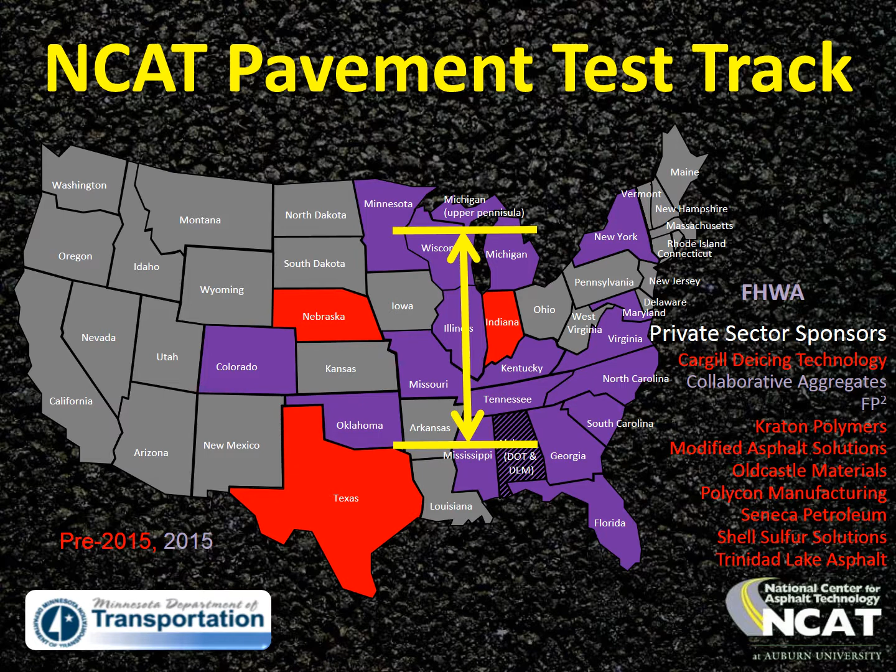FP2 has continued the sponsorship relationship it has as a full partner with all the state DOTs, and that has been extremely helpful to us in terms of making the right kind of selection of treatments, putting them in the right location, and achieving the right level of construction quality to get results that are as meaningful as possible from the research.

To address my subject today, I've grouped my content into 5 categories: smaller, finer aggregate blends, reduced gyration level mix design - some of these things Matt touched on - and what I like to call healthy binder content, which we're now trying to achieve through balanced mix design. That's just the way we did mix designs before the price of liquid asphalt skyrocketed and the pendulum swung towards drier mixes. Now we're trying to get more of the right binder content instead of just a dry, cheap binder content.

Reclaimed and recycled materials, and then finally, to summarize all that, what we perceive to be the need for not just a cracking test, but possibly a suite of cracking tests that predict the distresses and types of cracking that Matt talked about, but do it for the climate extremes.

Our perception is that we have a need for very simple tests that industry can run, both when doing mix designs and when producing mix for the state DOTs - tests that DOTs can use to approve mix design, not just tests useful for research purposes - and tests that cover the climate extremes. There are things that probably work at the track that don't work up in Minnesota, and vice versa.

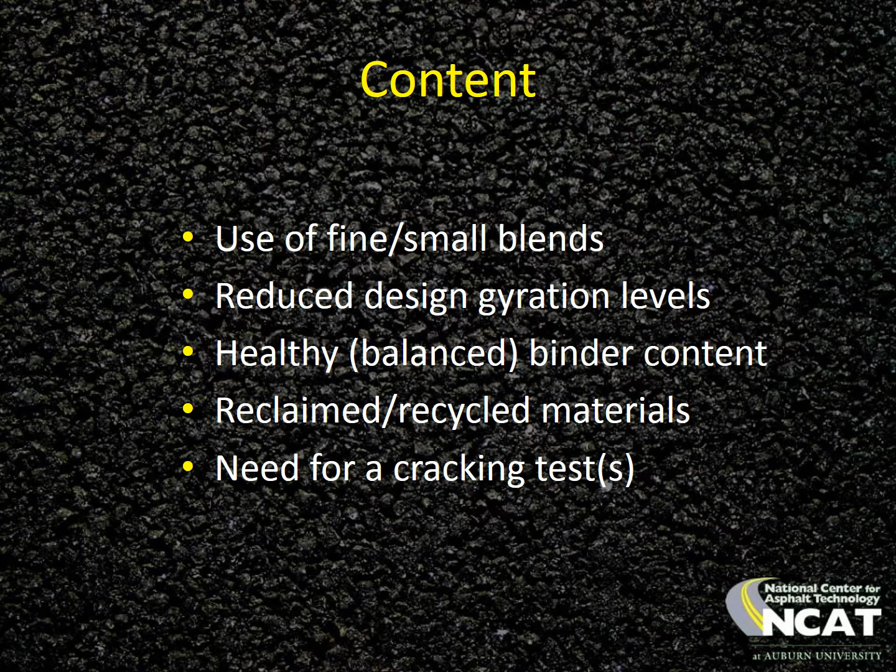So what we really want to do is just let the data speak for itself and identify which tests work and which tests don't work.

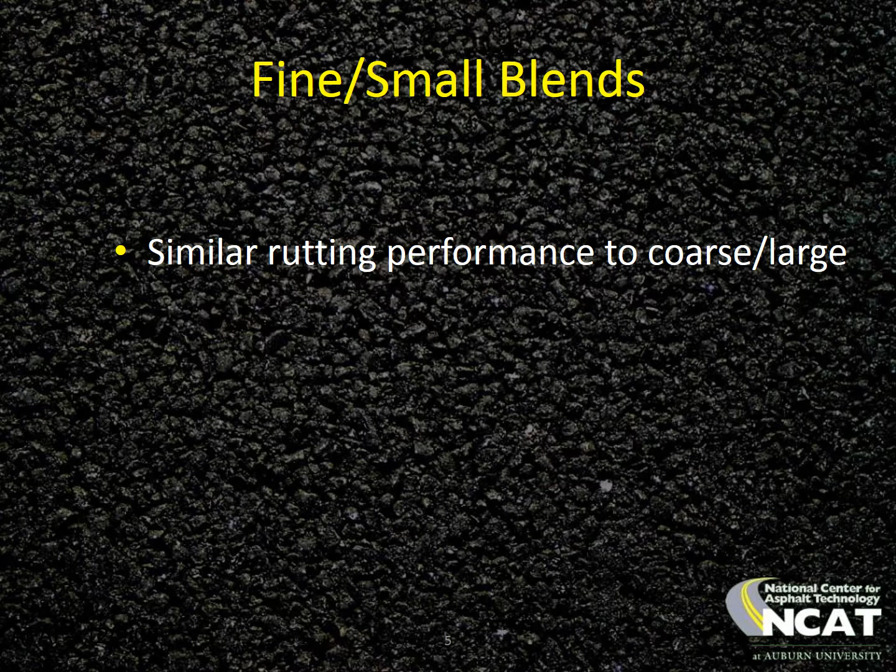On the subject of fine, small blends, through 5 complete cycles of testing on the track, now 51.5 million ESALs, we consistently see similar rutting performance between coarse, large mixes and small, fine mixes. I think because of the success of SMAs imported from Europe, and when we implemented SuperPave, we thought we had to have rock-heavy mixes to get this larger stone-on-stone contact. But we find that as long as we've got a good, stable aggregate structure, it doesn't matter what the size or blend is, whether fine or coarse.

The whole trick is there's a longer path for crack propagation, and also a higher effective binder content. It's ironic that the 2 best performing mixes at the track are SMAs loaded up with rock, and the finest blends loaded up with screening size materials - you go from one extreme to the other.

What they both have in common is high asphalt contents. We get high asphalt contents in those rock-heavy SMA mixes by loading them up with fibers to thicken the film coatings without a drain-down problem. And because of coating all those screening size materials, that's what gives us high effective binder content in the finer mixes, as I mentioned earlier this week in another presentation.

The 2 best mixes, arguably, that we've had on the track: the first is an SMA placed in 2000 that's still in place, now down for 51.5 million ESALs in 16 years, with no cracking, no rutting, no raveling. The other is a 4.75 thin overlay mix, only 3/4 of an inch thick, placed in 2003 - now down 13 years, 41.5 million ESALs, no cracking, no rutting, no raveling.

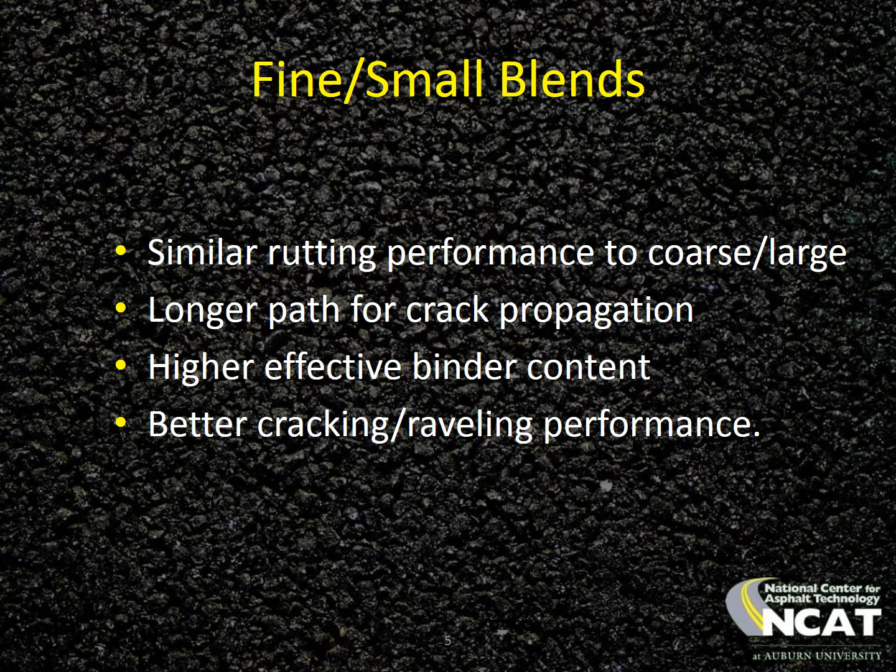To me, that represents those extreme conditions that we've got to capture and implement as an outcome. So we do see consistently better cracking and raveling performance.

The two things that sold me on this - I got really upset the first time we blew a tire on the track, probably back in 2001, and we had this nasty, ugly rim scar like we have on real roads, and it gouged the pavement. Those of you involved with agencies know that in a lot of cases that leads to a crack, and we have to go back and seal it, which becomes a big maintenance burden.

I was taught when I grew up within the DOT that fine mixes have their place on low volume roadways, but that's where we need to keep them. We need those rock-heavy mixes. I was with ALDOT when we did SuperPave implementation and started the PG binder grade system within our specification framework.

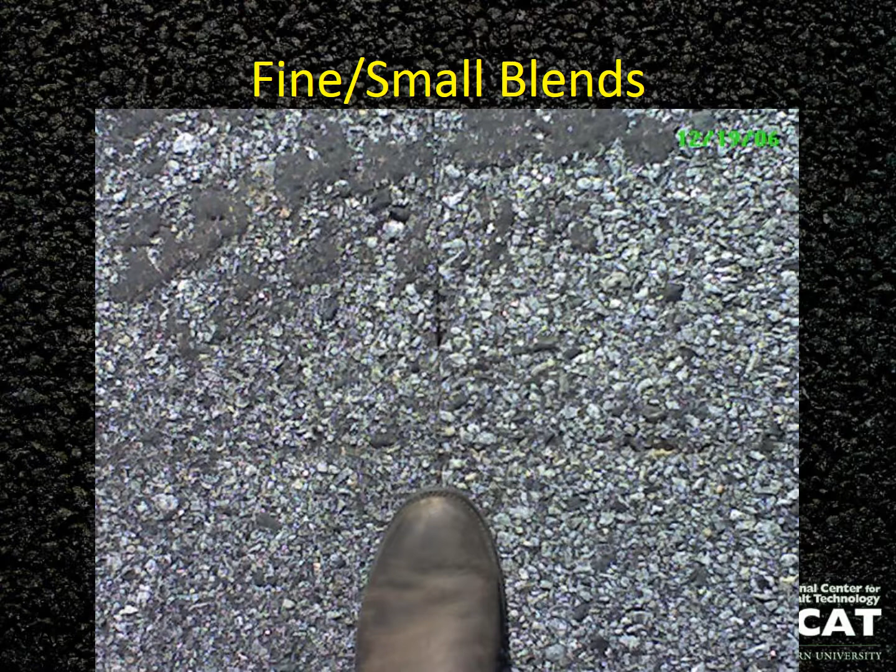You can imagine it's got all kinds of rim scars in it, because through the years we've blown a lot of tires and done a lot of scarring type damage. There's no cracking that has formed in that section. So that's the first big issue that sold me on this.

The second big thing was an event that occurred—some of y'all have seen this video—but we had a driver get too high in the west curve, and he dropped axles off onto a soft shoulder. We lost a trailer, and we laid down the number 2 trailer, and it just kind of dragged for maybe 400 or 500 feet. You might have seen the sparks flying up off the mat when that second trailer laid down and dragged through.

It happened to just fall over on that 4.75 mix—that's where this camera is pointing in the west curve. All it did was sort of scuff that mix up. But as soon as it hit the coarser mix out past it, it just started ripping out chunks of pavement. That is as good a billboard as we have for durability as anything we've seen on the track.

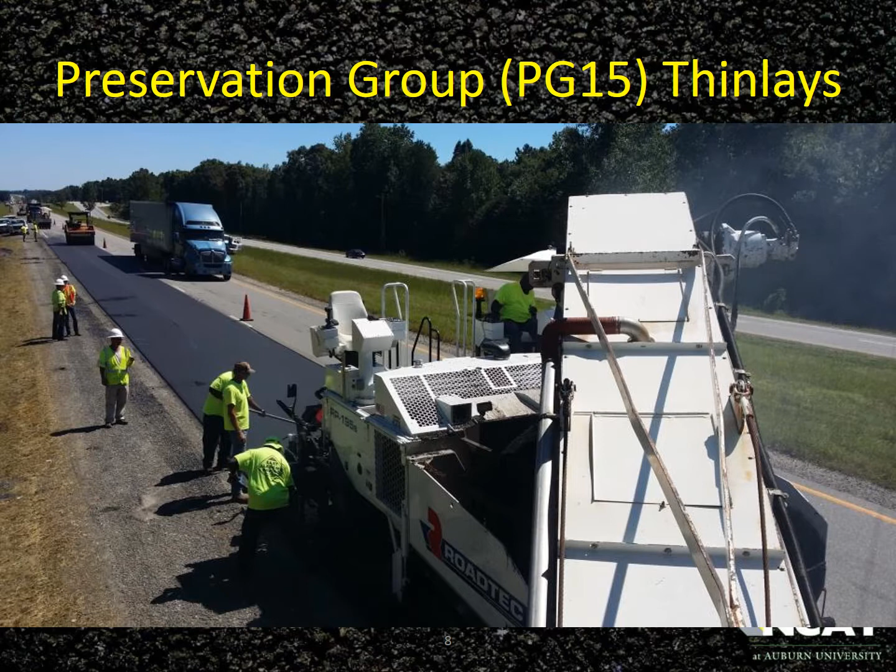So those really changed my mind about the potential of these finer, smaller mixes. When we did the thin overlays as part of the preservation study on Lee Road 159, and then grew that out to US 280, the hot mix part of that is these 4.75 mixes. The mixes we used on 159 and 280 are variants of that 2003 mix—the virgin part is 70% limestone screenings and 30% hard sand.

That's a limestone we wouldn't allow more than 30% of in a surface mix in Alabama, where we're sustaining friction at 70% because of the hard sand. So at that size aggregate blend, the hard sand is supporting the friction numbers, and we've measured years and years and millions of ESALs of safe friction.

So we added recycled materials—reclaimed and recycled materials—on 159: fine fractionated RAP and shingles. Then when we went out to 280 with this mix, we added both RAP and RAS, fine fractionated RAP and shingles.

But we did it in an iterative way, running mix at the plant, doing some simple cracking tests back in the laboratory, trying to get to a level where we felt we were going to get really good performance out on US 280.

Interestingly, I set out wanting to do a really high RAP binder ratio mix out on 280 in these thin overlays. I started at 50% binder replacement from fine fractionated RAP and shingles, then bumped from 50 to 40 to 30 to 20, and I had virgin mix to compare all that to.

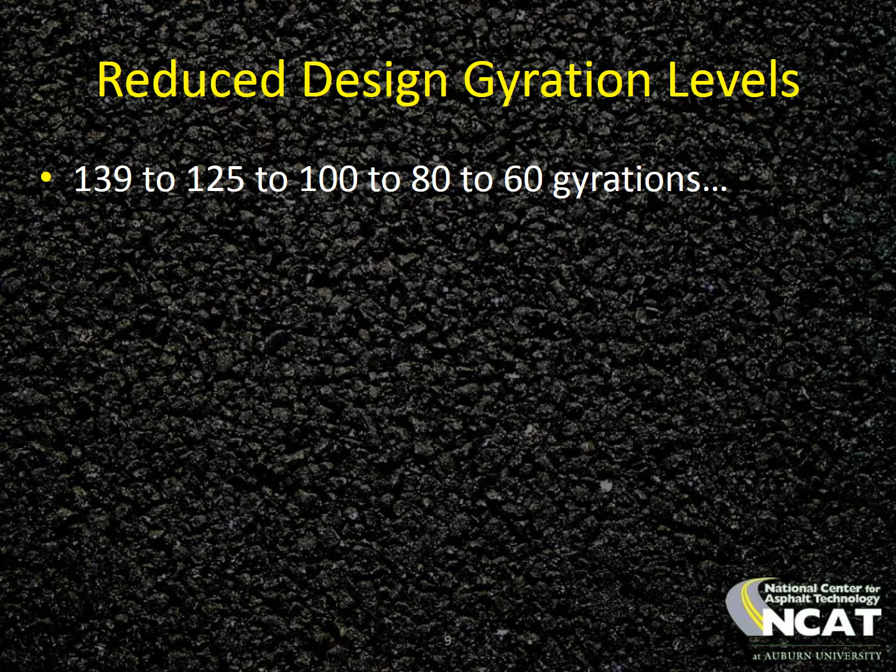So then also on reduced gyration levels, when we first built the track, the highest gyration level in the SuperPave package was 139 gyrations. When we built the first track, it was at 125, then we dropped it to 100, then we dropped it to 80, then we dropped it to 60, and now some states have adopted 50 gyrations. So we're working to try to get the right level of laboratory compaction in order to optimize asphalt content, and the track has been really useful to the sponsor states in order to help do that.

I'm still shocked when I go do presentations in states that I don't have a research relationship with, and they're still using these massive levels of design gyrations, which give us dry mixes, and then we all get upset when we have poor durability and cracking performance in the field. Well, it's part of the reason why: design gyration levels are too high.

So what we promote, and what most states have kind of settled on, is a locking point type of design. At what point are you just crushing aggregate? I think a common place where people are finding with their materials that they're just crushing rock and doing nothing else is somewhere between 50 and 70 gyrations. And it depends on the durability of the aggregate that you have. Any more compaction and you're not really doing anything constructive, you're doing more harm than good.

And the irony is that we use higher gyration levels for higher traffic levels. So where we need more durability, we run the risk of having drier mixes. It's really important to figure out exactly where you need to be with lab compaction to hit that locking point so you can have the healthiest possible mix out there on the roadway. More gyrations produce leaner mixes where we really need richer mixes.

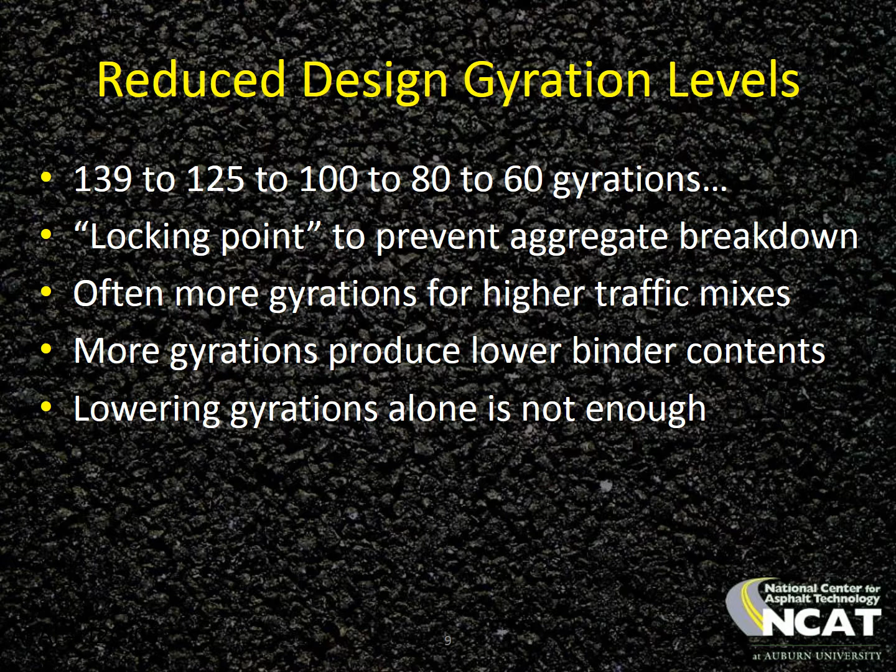But lowering gyration levels alone is not enough, because if all you do is lower design gyration levels, and you've got a good sand source, you can put more sand in the mix and get the same level of air voids, and you really hadn't necessarily done anything. So that's not the only thing you have to do. That's an important thing to do, but we have to remember the importance of VMA.

A lot of DOT people are accustomed to thinking about VMA and evaluating mixes based on VMA, but they don't really get why it's important. It's really simple why it's important: VMA is equal to the air void volume and the effective binder volume. So if you're settling on 4% air voids or 3.5% air voids, whatever your air void design is, then setting a VMA level is supposed to ensure the right level of effective binder content in the mix. That's the only mechanism we have to ensure effective binder volume.

The problem with that is VMA, unlike air voids, is not measured, it's calculated. And the key variable in that calculation is the bulk specific gravity of the aggregates. Matt alluded to this in his presentation: the more you add reclaimed and recycled materials to the mix, the less you have any idea what the bulk gravity of the aggregates really is.

And what I have seen happen in the field, and this is something that's very near and dear to me because I get mix designs from state DOTs to build and put on the track, the mix design has the stockpiles that I have to haul down for their test sections, and it shows what their database says is the bulk gravity of those aggregates. When we run those aggregates in our lab, we very typically get way different numbers, and those way different numbers lead to way different VMA calculations.

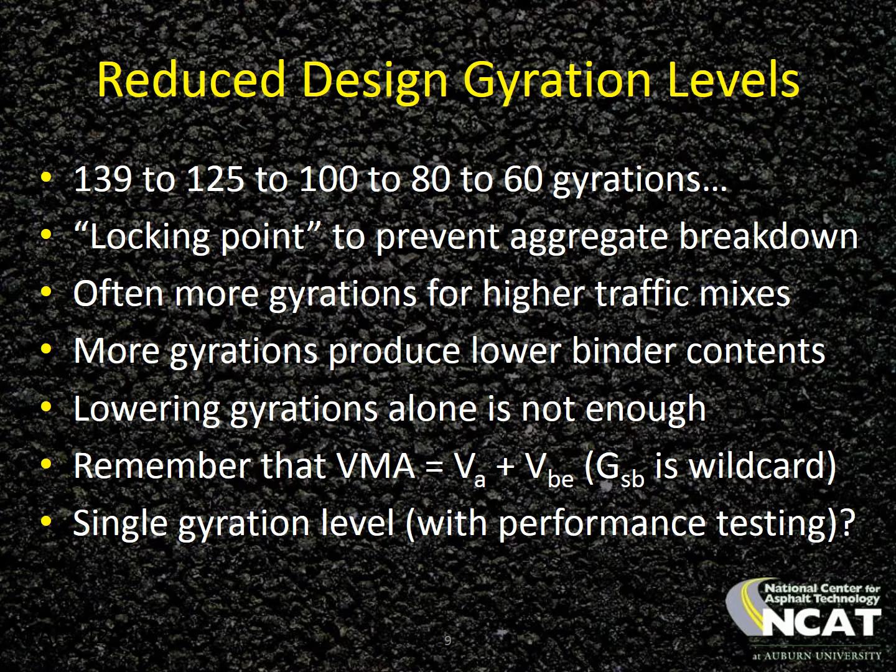Matt did a really good job talking about this, but how much blending occurs between old binder and new binder? Well, that depends on whether you're running hot mix or warm mix, how much silo storage time you have. If you do extractions and recoveries and binder grading, it's going to assume 100%, like you said. Well, with RAP, the data suggests that the vast majority of RAP binder, and in some cases all of it, is available for blending and diffuses with the virgin binder. But with shingles, probably something like three-quarters of it is available for blending, so a quarter of it is good for nothing other than giving you a false sense of what that asphalt content of the mix is. So you have to have a performance test.

Well, the concern they have, of course, is rutting. What we need to do is—their perception is that we have a longitudinal joint performance problem. Or really what they have, I think, is more of a mix durability problem that's creating the problem with the longitudinal joint. So we want to help them solve that, but yet prove that we haven't compromised rutting performance in the wheel path.

So we paved the inside lane and the outside lane of the track. That's not something that we usually do. And we lined up the longitudinal joint between the lanes right on center line, which is not something that we usually do when we're looking at mix performance in that outside lane where the trucks run.

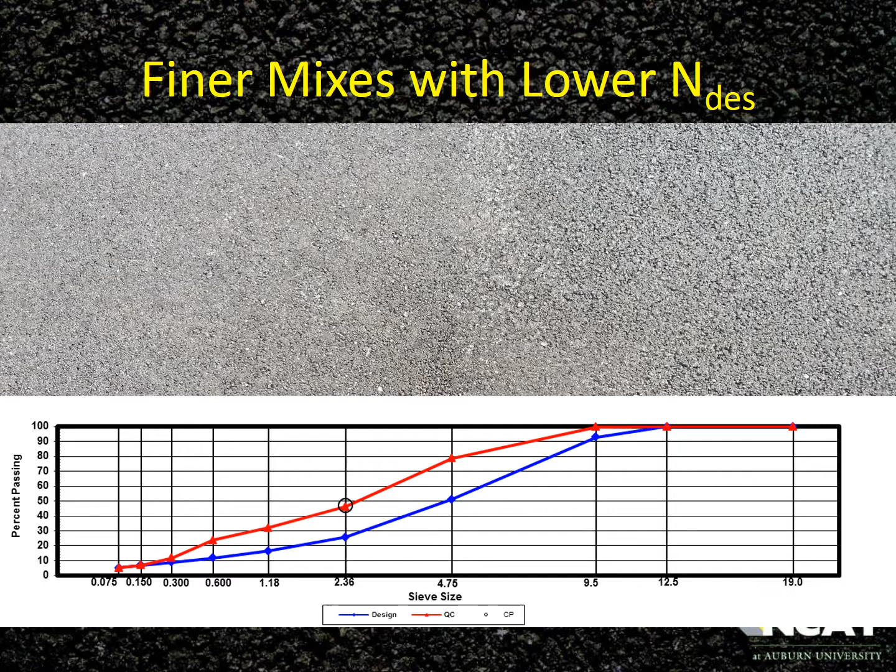You know, usually we think if we're at 92, 93%, well, that's a home run. We've done a great job with those mixes. Well, they're permeable. 19 millimeter mixes are permeable at 92, 93%. 4.75 mixes and 9.5 mixes and 12.5 mixes are not. So, the whole idea of density, we have to view that within the lens of how big is the mix, and that's another advantage of those finer mixes is they're impermeable at lower levels of compaction.

So that kind of brings me to healthy binder content. Well, just talking about reclaimed and recycled content in the mix by total mix weight is not enough. Very typically, state DOTs will have specifications. They'll say 20% RAP, RAS in the surface, 30 or 35, or in some cases 40%, RAP, RAS in binder layers and base layers. Well, what matters is the binder replacement that comes from RAP and binder replacement that comes from the shingle.

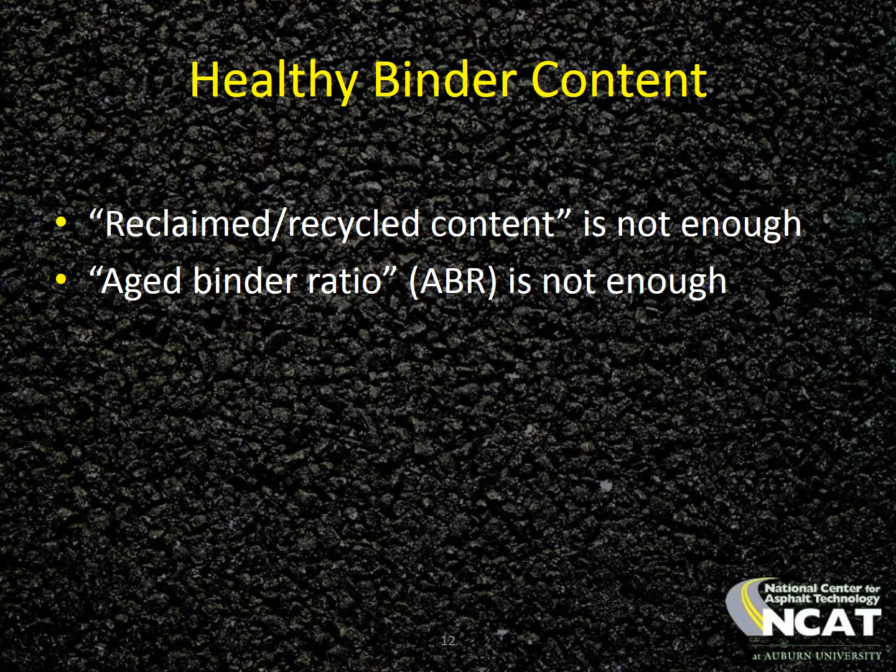So aged binder ratio by itself is not enough. We need to talk about RAP binder ratio and RAS binder ratio, and then even with shingles, it's better to talk about post-consumer RAS binder ratio and manufacturing waste binder ratio because of the age hardening that occurs on roofs before shingles are removed and ground up, processed for use in asphalt pavements.

And this is something I'm having to train myself to do, because that thin overlay out on 280 that we built last summer, 11% fine fractionated RAP, 3% shingles. Well, if you look at binder replacement, that was about 10% from RAP and about 10% from RAS. That's what really matters. It's not the RAS percentage in the mix by mix weight, it's the binder contribution of the binder replacement that you get.

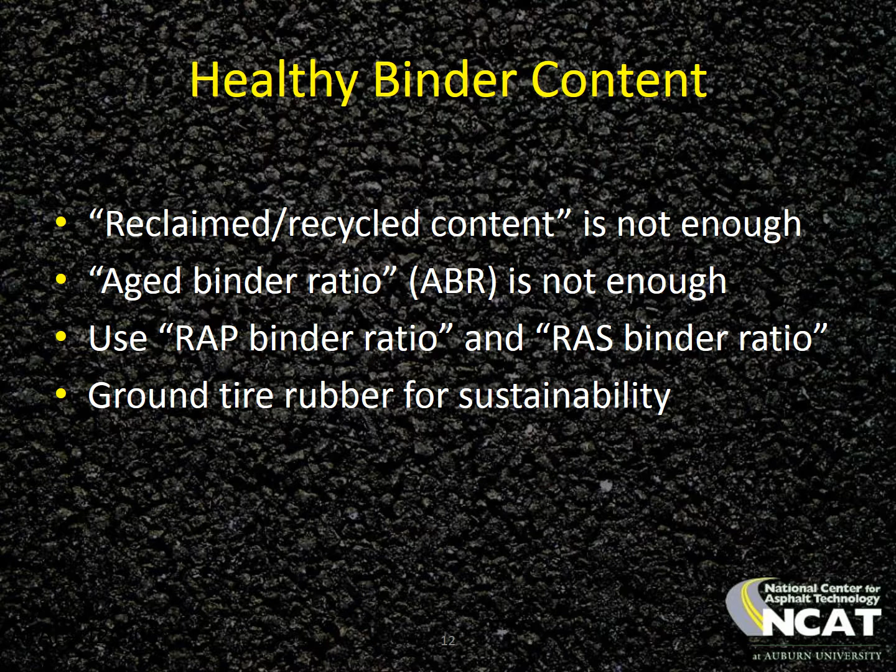We promote ground tire rubber use for sustainability. We've had really good success with ground tire rubber modification of binders, and in fact, Alabama Department of Environmental Management, thanks to Lindy, was a partner in the last track and is a partner in this track, and we're doing work specifically for them to investigate the best use of recycled ground tire rubber in pavements for mix production and

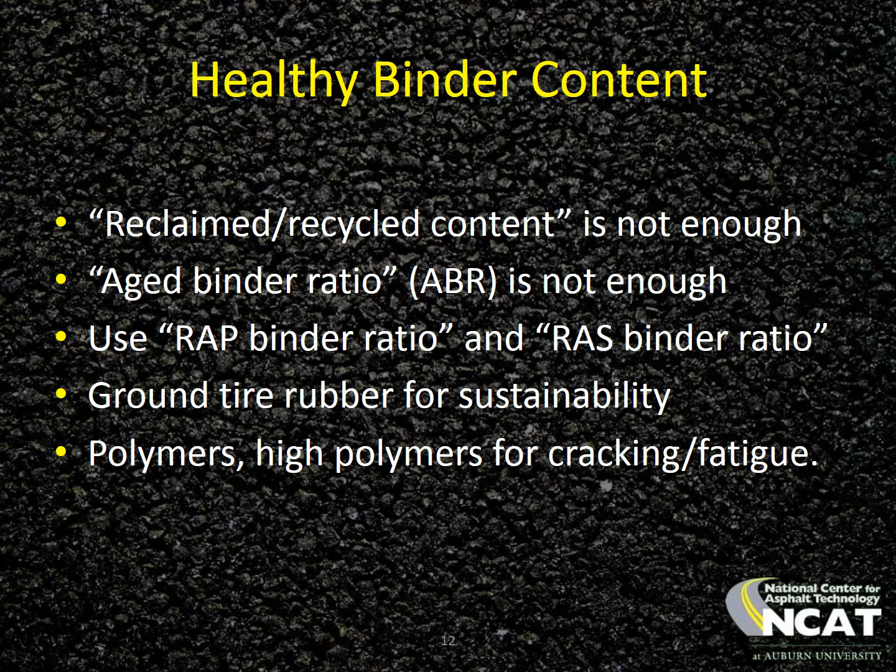also for pavement preservation. Polymers and high polymers for cracking resistance and for fatigue cracking performance of mixes has been a big part of what we've done at the track, going all the way back to the 2009 research cycle. And we've used highly polymer modified binders in a big way that I'll mention in a little bit in the 2015 track.

One of the more exciting things to me regarding recycled ground tire rubber, we've got asphalt rubber mixes, we've got SMAs and OGFCs that we've done that are just ARB binders, 12% binder replacement. But we did work this last summer with 20% binder replacement using coarse ground rubber, minus 16 rubber, and we used it for plant mix production for asphalt rubber gap graded mix, but we also used it for asphalt rubber chip seals.

Rod Birdsell is here, and Rod provided me with some tech support last summer, because they do some of this up in the Northeast. What you see on the left is a coated 7 chip asphalt rubber chip seal, and on the right in the background, that's a coarse fractionated RAP asphalt rubber chip seal that we placed last summer.

That's immediately after placement. Now this is what these look like now, after 1.5 million ESALs, and they look really good. Rod could probably talk about this, but constituents are going to feel better about this than about the typical granite or limestone chip seal that doesn't really look like a paved surface. With embedment of these coated 7 and coarse fractionated RAP particles, this looks like an asphalt pavement, and I could see people being really pleased with it.

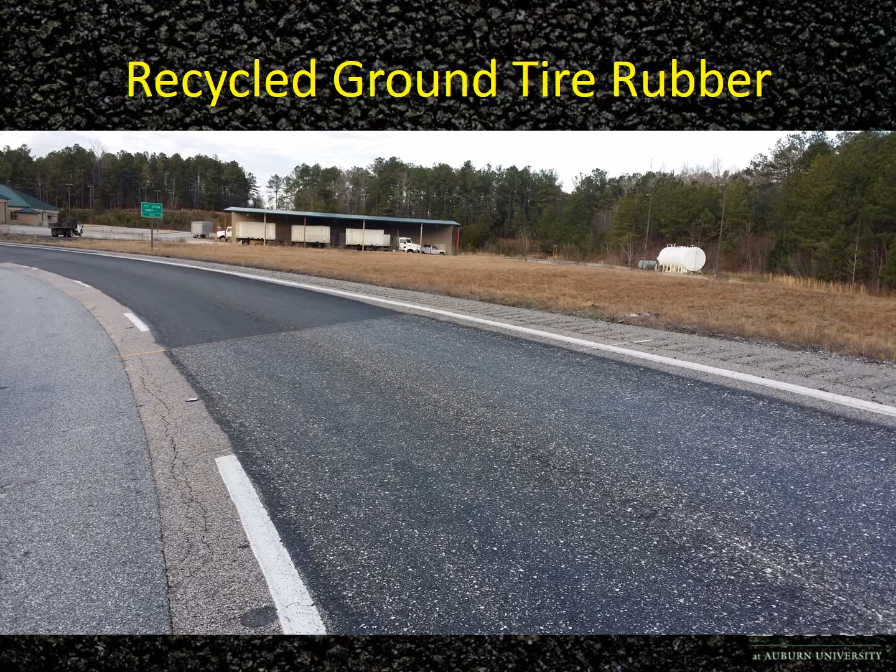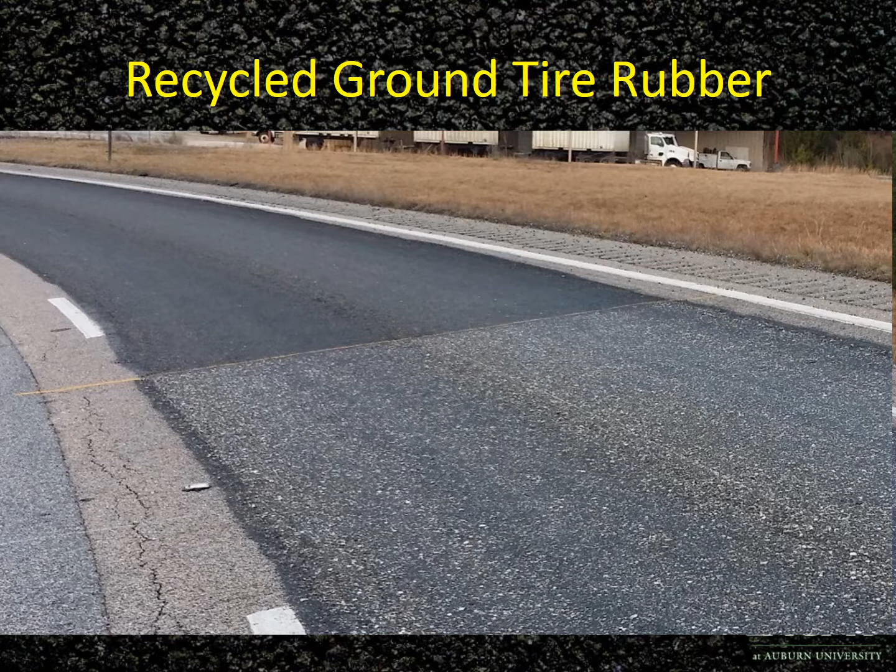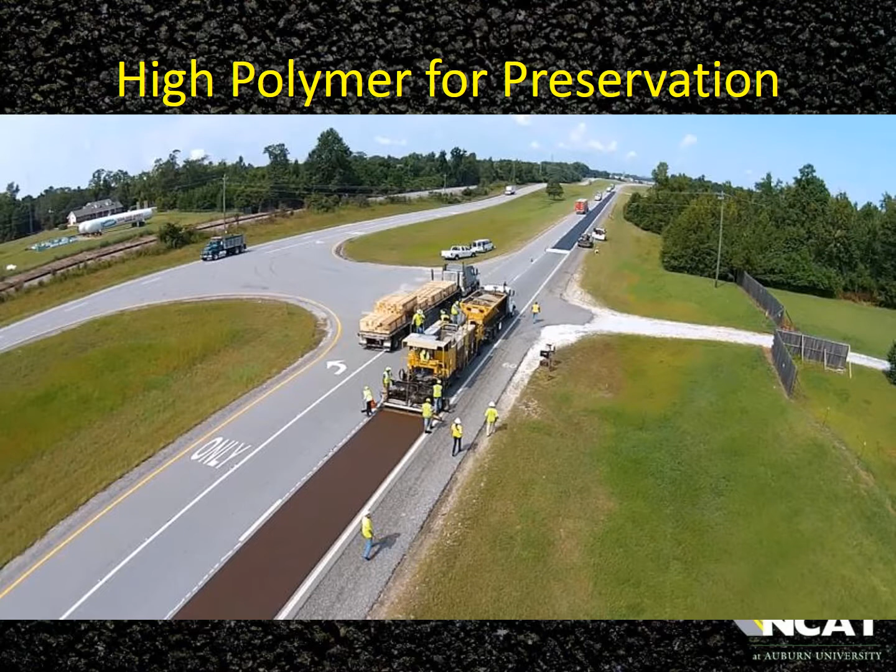We also used highly polymer modified binder out on 280 in one of the microsurface sections we placed. So far we've had excellent performance from all of our treatments: fog seals, crack seal, microsurface, chip seals, cape seals, thin overlays, OGFCs. We've got a big variety of cold recycle mix out there too, and excellent performance from those to date.

Something interesting to share with this group: Florida DOT has used polymers in their binders to address surface cracking problems. They've historically had a big problem with surface cracking of their mixes, so they use SBS modified 76-22 aggressively in their surfaces, and it helped solve that problem. When they started phasing in RAP into their mixes, they wanted to stay with their polymer binders. So they're currently capped at 20% by mix weight—they don't allow shingles, but you can put 20% RAP in your surface mixes, and you're still going to put 76-22 binder in it because they want to control that cracking problem.

They're working with the industry in this research cycle. We've got a test section with 20% RAP and SBS 76-22, and 30% RAP with SBS 76, and we've also got a 30% RAP section with a polymer modified 58-28. So they're looking at the possibility of going to a softer grade of virgin binder, but still using polymers to support that higher RAP content, and letting the economy of binder availability drive the mixes contractors pick to place.

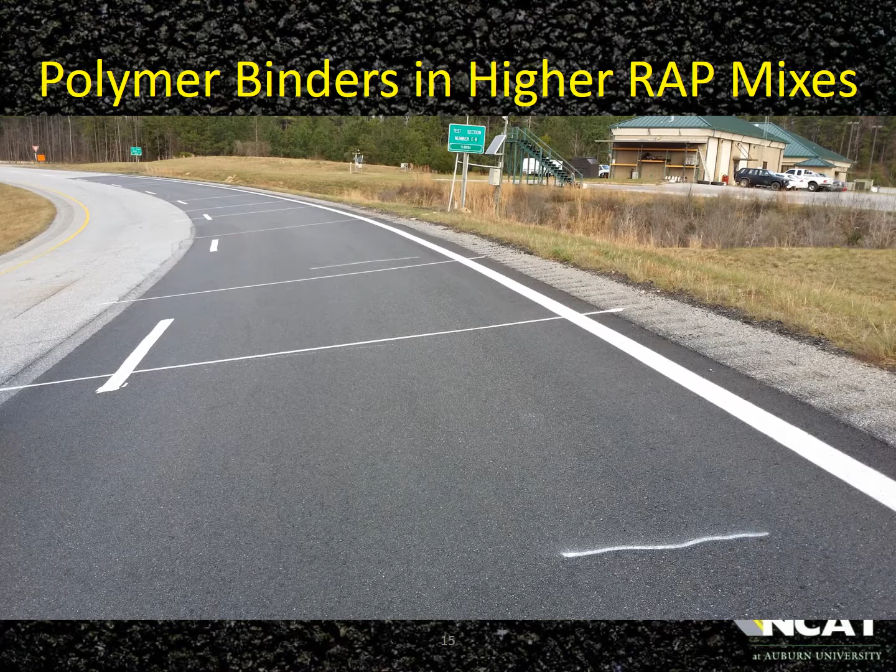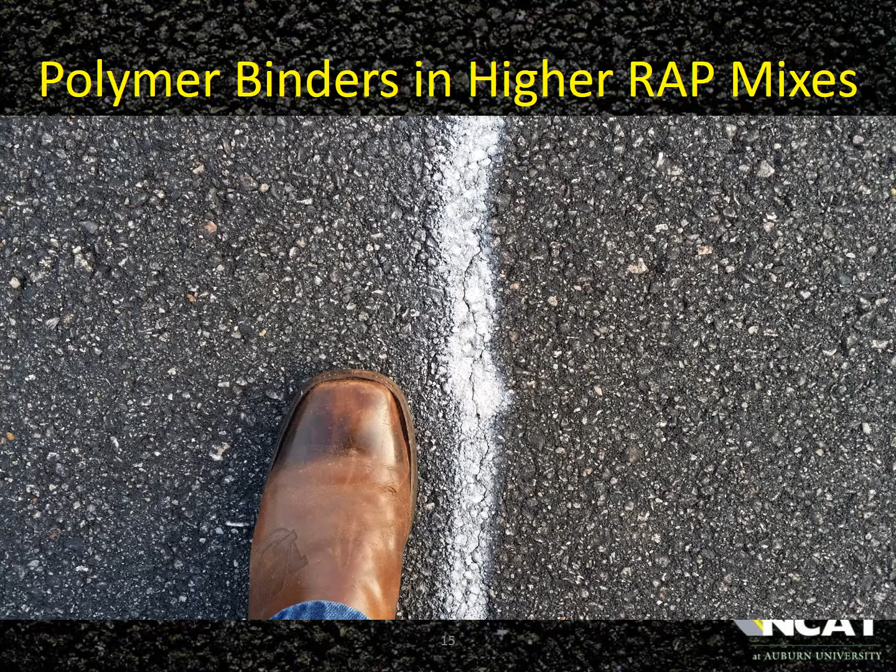Interesting thing is we've got a couple of cracks, shown in this picture, in the higher RAP content with SBS 76. No cracks in the lower RAP content with 76 or the higher RAP content with 58-28. So we're going to be watching that and reporting on it. These are very low severity cracks—we paint them so they're easy to document and record the X and Y geometries, but you wouldn't see this with a network level data collection vehicle. We have to do really close inspections to find these cracks. So performance has been very, very good so far.

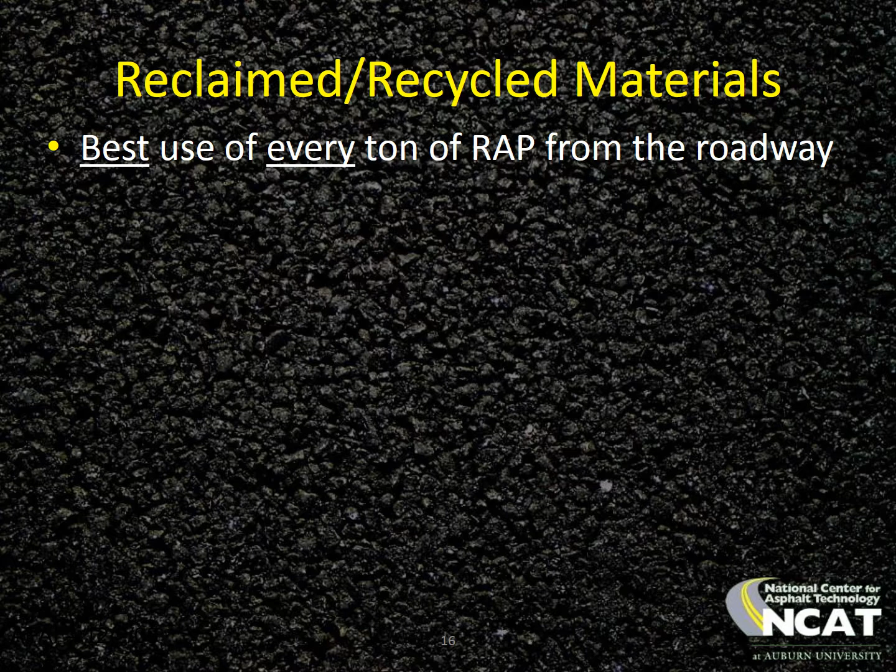Regarding reclaimed and recycled materials, we promote the best use of every ton of RAP from the roadway. We don't need million-ton RAP piles accumulating in urban markets in different parts of the United States, where they have to put beacons on top so planes won't fly into them. There are huge resources in those RAP piles, and we need to use every ton. I'm not saying we need to load up our surface mixes with RAP—I'm saying we need to use every ton as we build, maintain, and preserve our infrastructure.

I think fractionation is a great way to optimize value because you end up with black rock, kind of dry, on the coarse side of the RAP pile, and you end up with really rich sand with a higher asphalt content on the fine side. If I was a contractor, yeah, I would fractionate just to optimize the economy of the availability of those materials. The main point I try to make with people is that RAP is a moving target.

With DOTs, we want to set threshold limits that we can lock into and stay on, like 20%, 30% RAP. Well, what we've seen in the track data, since we've been doing this long enough and using state-approved RAP piles, doing recoveries and extraction grading, we started using RAP mixes in 2006, using East Alabama Paving's ALDOT certified RAP piles.

And what we saw was that the recovered binder grade in the RAP at that time, because it was virgin when it was originally paved, was like in the PG 80s on the high end. Well, in 2009 and 2012, that was second generation RAP, because that RAP was up to 15% RAP in the mix when it was originally paved. So now it's been recycled again. Well, those RAP binder grades are now in the PG 90s in 2009 and 2012.

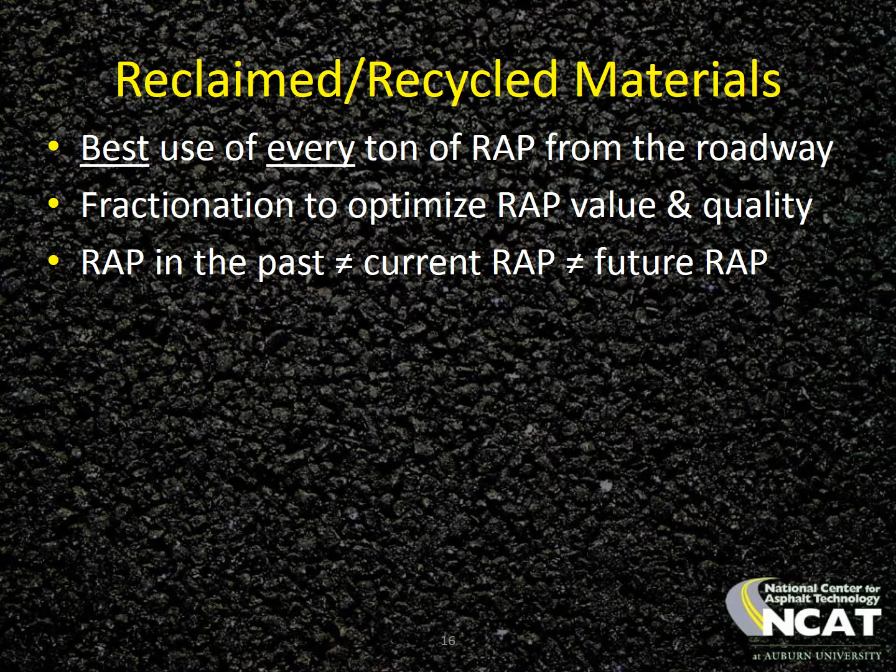RAP is a moving target, and I've never been an advocate of using a whole bunch of grades or rejuvenators, but we need to be as sustainable as we can be, and we're going to need to look at those technologies so we can use every ton of RAP in the best way possible. Same thing for shingles. We've got to continue to use shingles, but with shingles and with the aging RAP, as we go through multiple generations of recycling, we're going to need softer asphalts, rejuvenators, richer mix designs, things like that, so we can continue to push the envelope and be as sustainable as possible, as green and as low life cycle cost as possible.

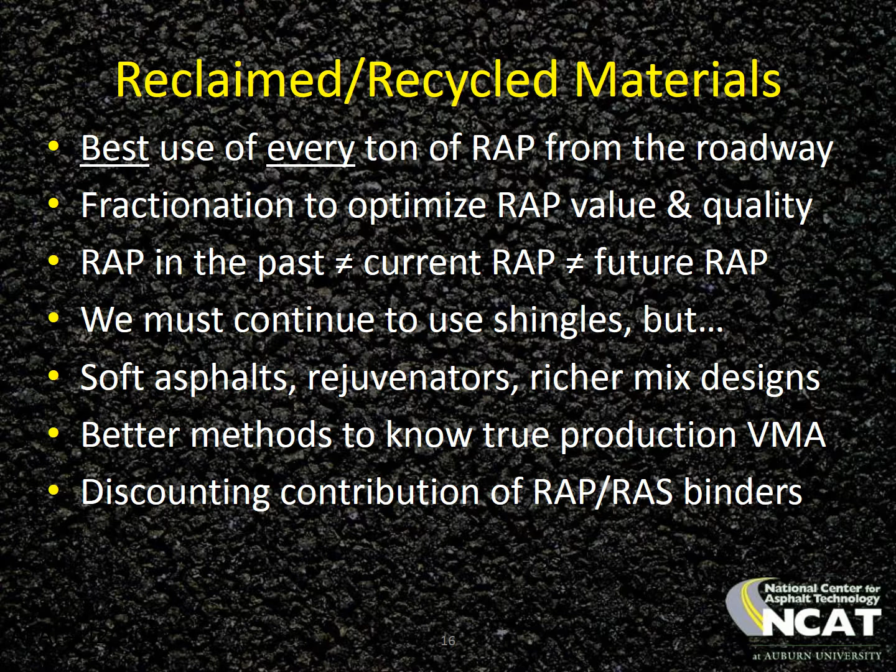It's very, very important. We need better methods to know a true production VMA, and we need to be realistic about discounting the contribution specifically of the shingle binder. For states controlling quality with volumetrics, that's a challenge, because if you say we're only going to give you credit for 75% of the shingles, but then 85% of the shingles affects the volumetrics of the mix design, it's going to make it really hard to produce the mix the state is requesting and get a good pay factor for it.

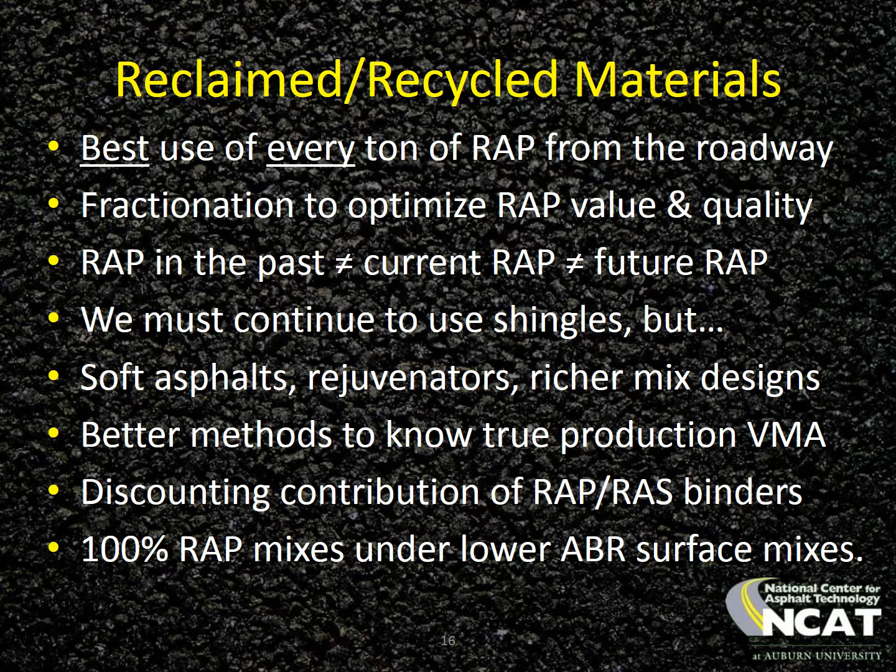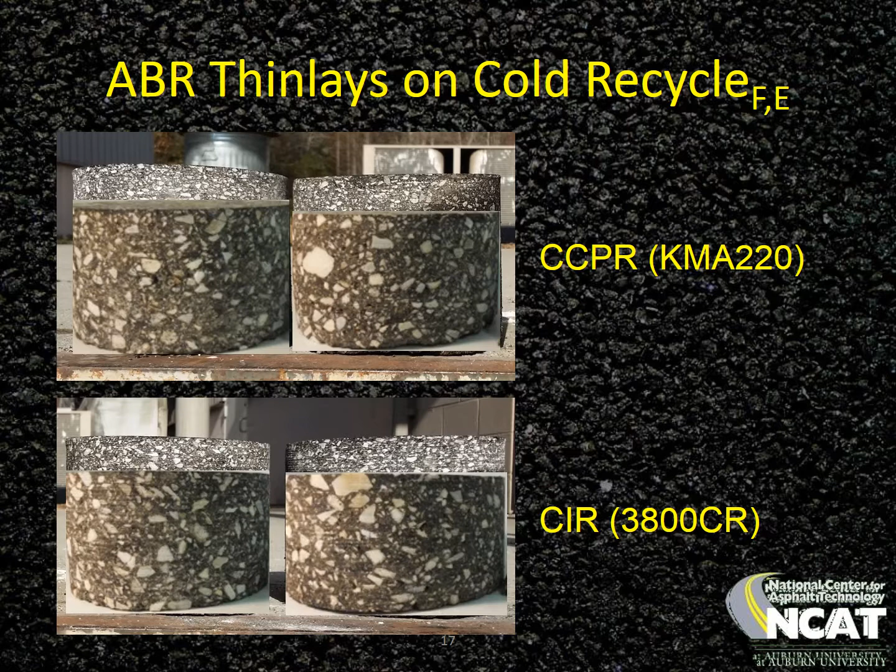Dry those cores out and look at them again. And even though the QC samples for foamed asphalt look way different from emulsified asphalt, after 3 or 4 months of traffic, that mix is transformed, and I really think we're going to get amazingly good performance out of all 4 of those mixes out on US 280. All we did was put a good thin overlay roof on the house in order to keep moisture out.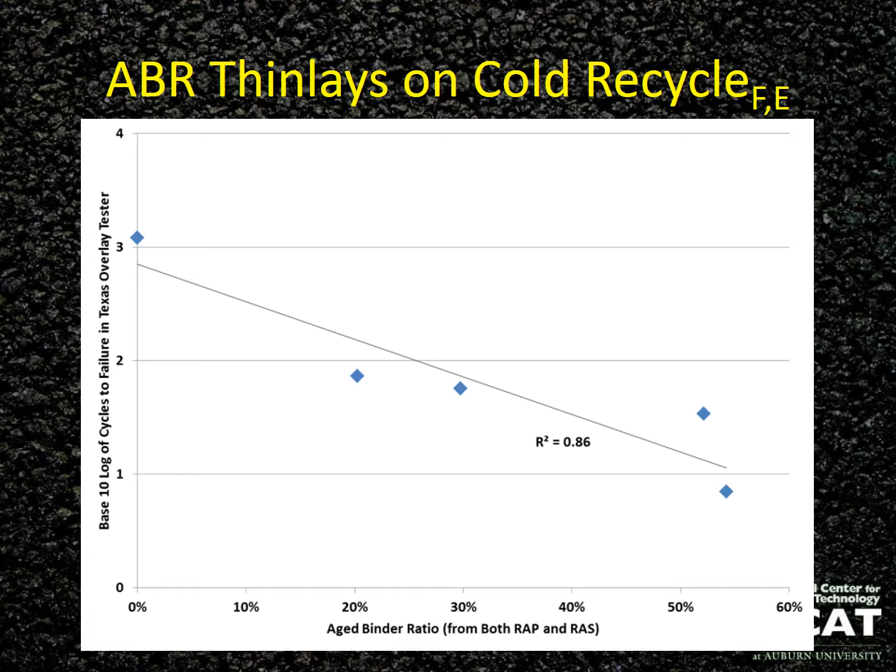But yet, because it has 4 or 5 times the binder content of RAP, that little bit of shingles that you're dribbling into the mix can have a big effect on quality control testing in the laboratory. So kind of the bottom line to all this is we need a cracking test, and we need one bad.

We need a suite of potentially of cracking test options. My bias is that I think academia breeds divergence and chaos when it comes to this type of thing, because you can't get a PhD by proving something that already exists or by improving something that already exists. I was naive about this when I started my PhD program at NCAT. You typically got to make something new. Well, you make something new, and then you're going to promote it.

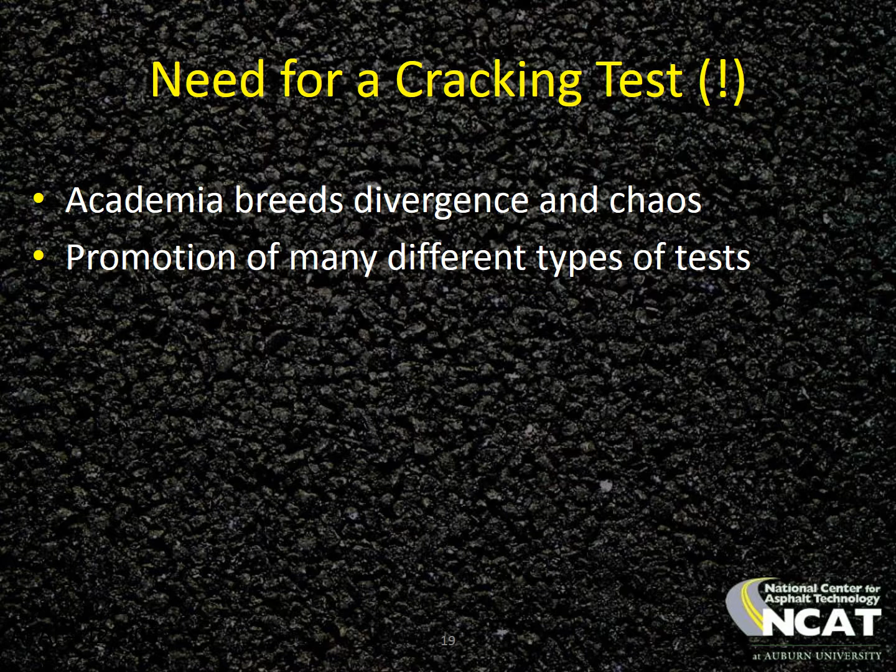So we got all these cracking test options, and then tweaks on cracking test options, and it's chaos. I mean, we just need to figure out what works and what doesn't work. So there's promotion of many different types of tests. Well, because of my background, I get it.

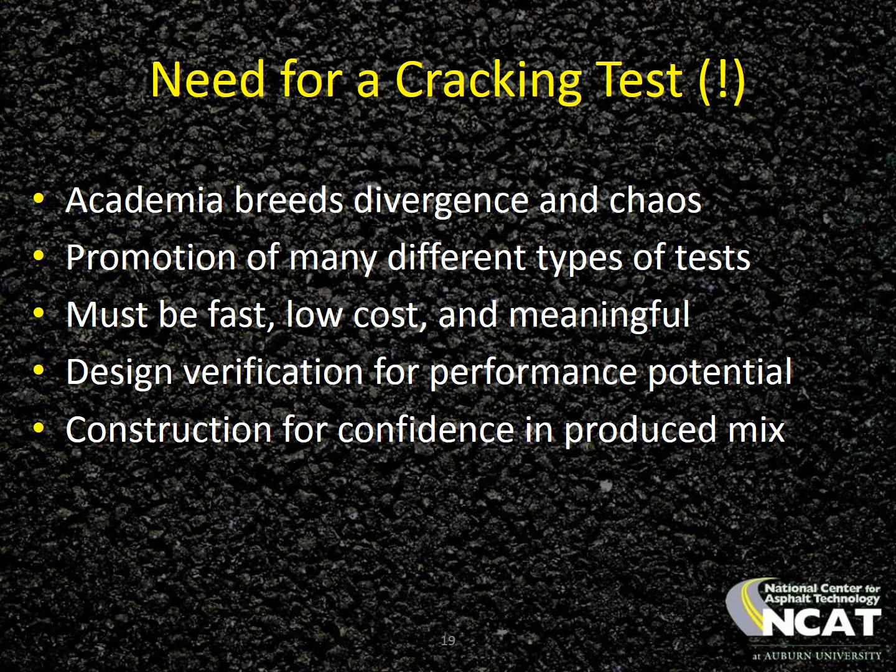But if it's simple enough, is there something you could do within every sublot without any kind of elaborate aging that would at least give you some confidence level that we didn't change RAP source, we didn't bump the sand content up, something hokey hasn't happened at the plant that's going to blow out, or shingles running up higher than they're supposed to be running.

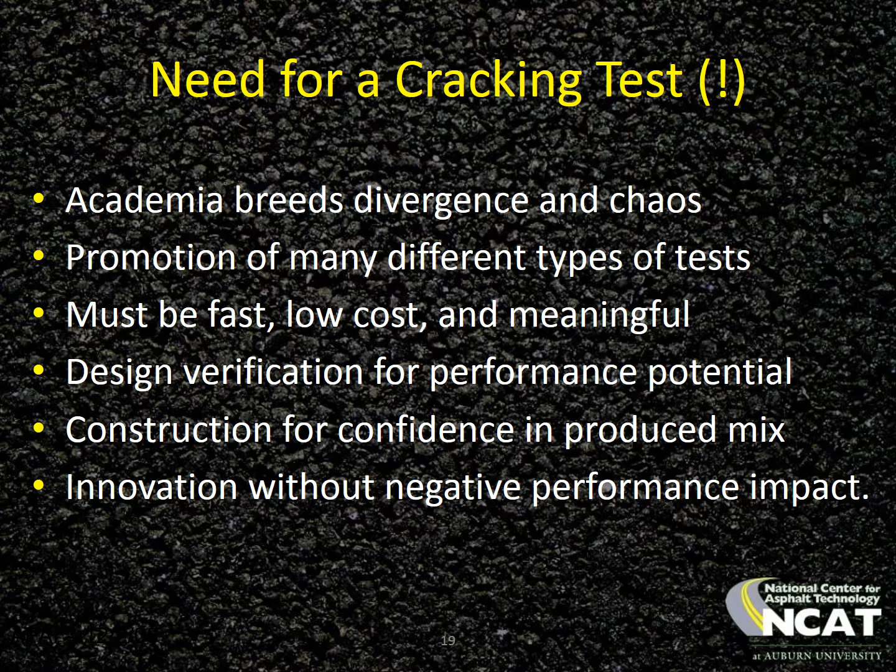So, we've got to innovate. We've got to get to a cracking test. We've got to do it in a way that improves pavement performance, that does not have a negative impact on pavement performance. So we've got this cracking group experiment that we're executing within this research cycle.

We got seven different mixes, and these are surface mixes in thin pavements. The base layer and the binder layer are highly polymer modified, so we're not going to have bottom-up fatigue cracking. But they're thin, so we've got a lot of deformation going on. What we're trying to do is crack the surface mixes, and we're focusing on surface mixes in our study because we're not building a lot of brand new pavements from the bottom up. We're doing a lot of surface work, so we need to be focused on that surface mix performance.

And we've got mixes that vary from the 20% RAP control mix to 35% RAP, and then with shingles. We've got an Arizona rubber surface mix, and we've even got the higher compaction level test section that we built for FHWA.

That was the scariest thing I did last summer, because I had to run it at the same asphalt content and the same temperature and use all the same compaction equipment, but yet shoot for getting 2 to 3% more density. And that scared the crap out of me, because it's hard enough to get density in short production runs when you've got everything great, but to get 2 or 3% more is really, really challenging. Well, we did it. You can do it.

You just got to have a lot of roller assets out there, and you got to have a good game plan to achieve that higher level of compaction.

In this study, we're looking at the test that Matt showed on his slide. I get it, we want to be mechanistically correct, but from my perspective as a DOT guy, if you could take your QC samples and throw them in an LA abrasion machine every sublot that you test, and do a Cantabro test to get a good indication whether something's gone wrong with that mix, that's a great test to run. There's nothing mechanistic about it. It's a durability evaluation, just a torture test. Other than percent loss, there's no mechanistic thing to it.

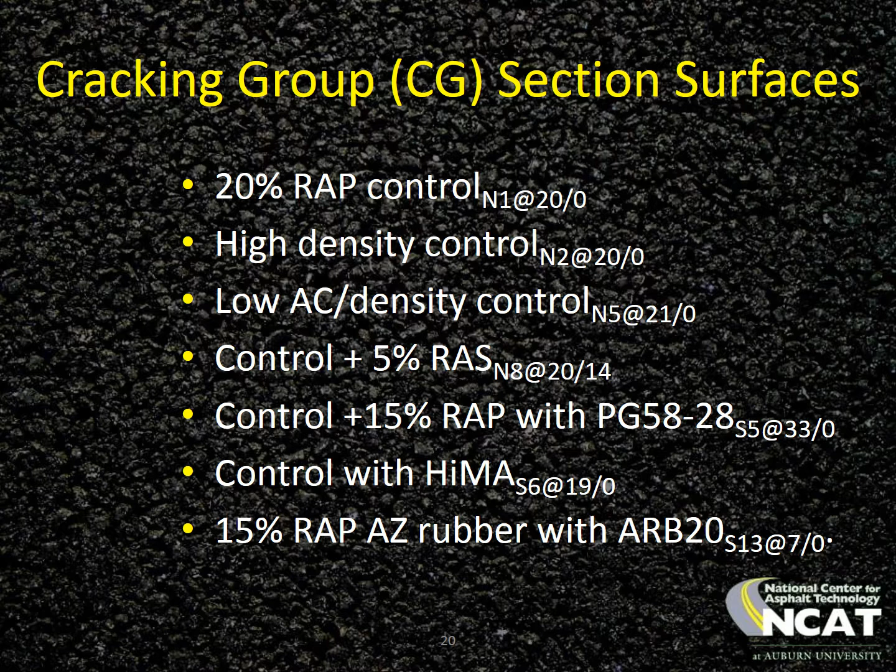But we're including that in our study because wouldn't it be great if we can put that in our specifications, and it would keep somebody from running 10% shingles instead of 3% shingles like they're supposed to in their mix design. So we're using the Marshall press, similar to how they use a simple compression test in Japan from the Japanese scan tour. There's a lot of simple things, like the overlay tester, but we're including a lot of simple stuff in our cracking study in addition to the mechanistic tests we all want to see succeed, because this has got to be something we can implement for both mix design approval and quality control testing.

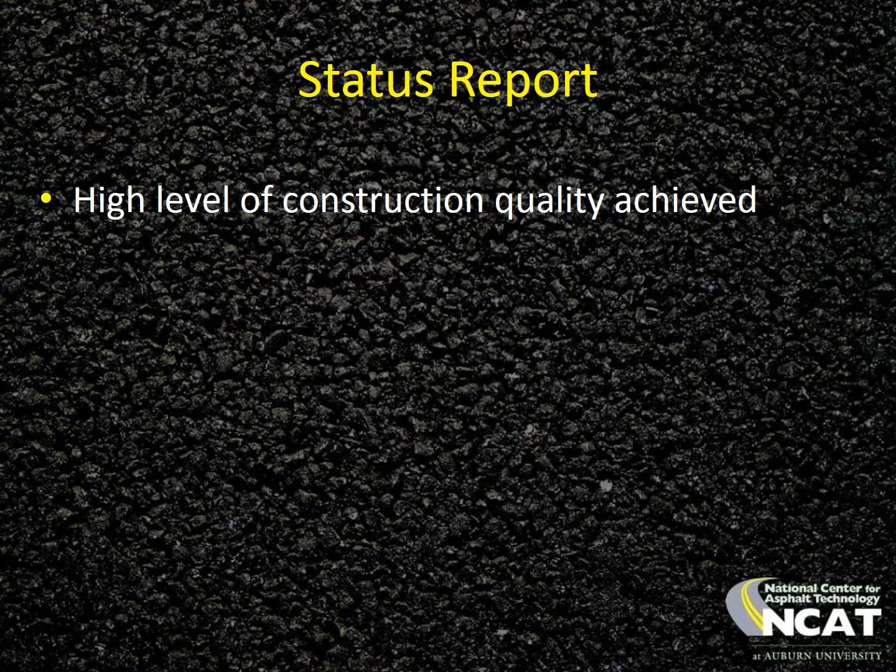To finish up with a status report, we got a high level of construction quality. We hit all of our targets last summer, which is step number one for us. We're over 1.5 million ESALs on the track. The only concerns we have are some transitional issues between test sections. We've got some maintenance work to do because we're going from thick sections to thin sections, ramping in and ramping out, so sometimes we have glitches there that we got to take care of.

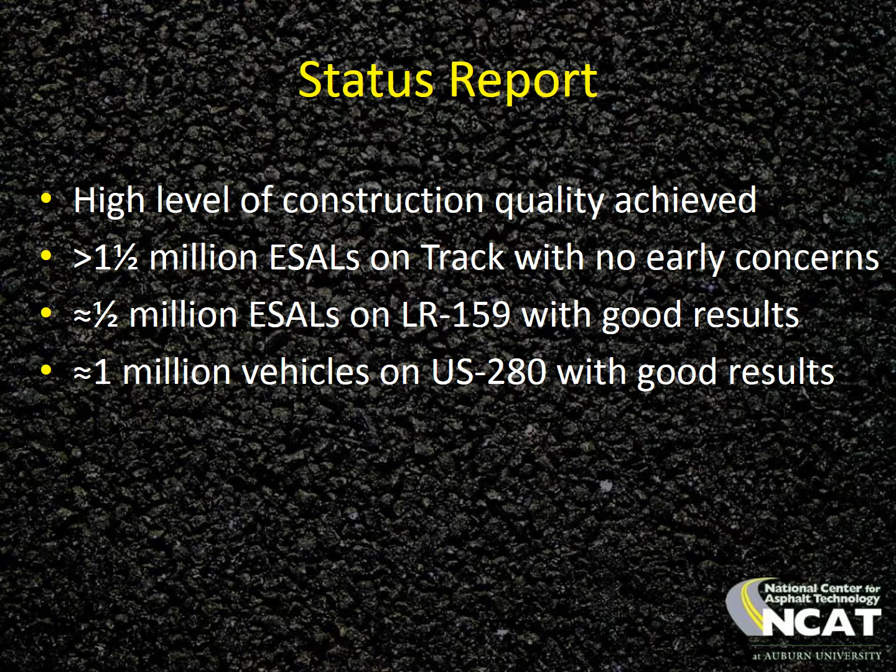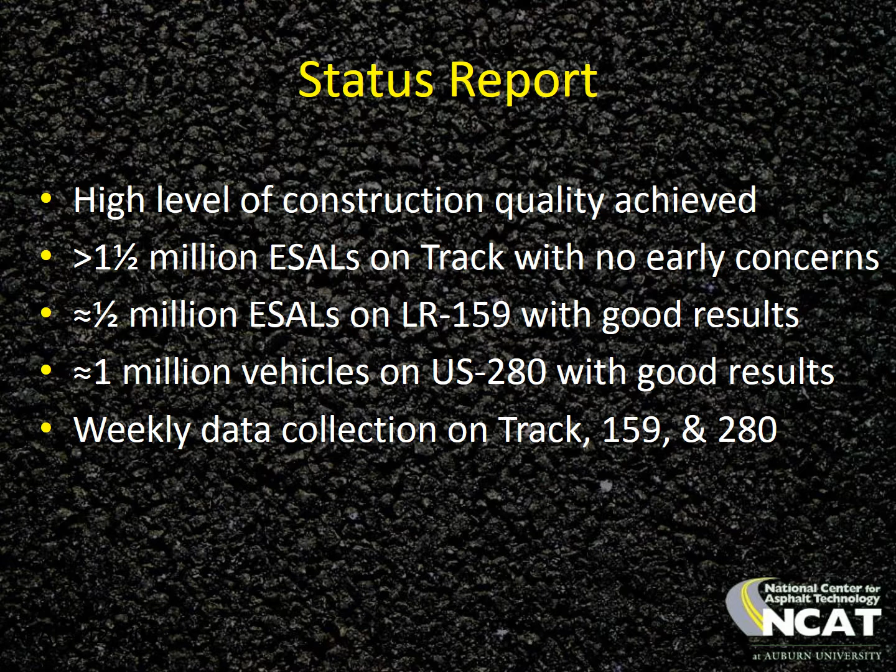But the research in the mixes is going extremely well. We're about 500,000 ESALs on Lee Road 159, about 1 million vehicles on US 280, with good results. So pavement preservation across the board has been a very successful endeavor for us with the plant mix sections and the non-plant mix sections. Everything is doing extremely well, and we're very excited about generating that objective life-extending benefit data for all the treatments, the non-plant mix and the plant mix. Collecting data every week in 3 locations now, not just on the track, but on 159 and on 280.

And we're kind of buried in the planning process with MnROAD because we're going to be building a lot this summer and working through their procurement system. We're really not as far along as we would like to be, but we'll be building sections and placing treatments this summer, and we're very excited about that.

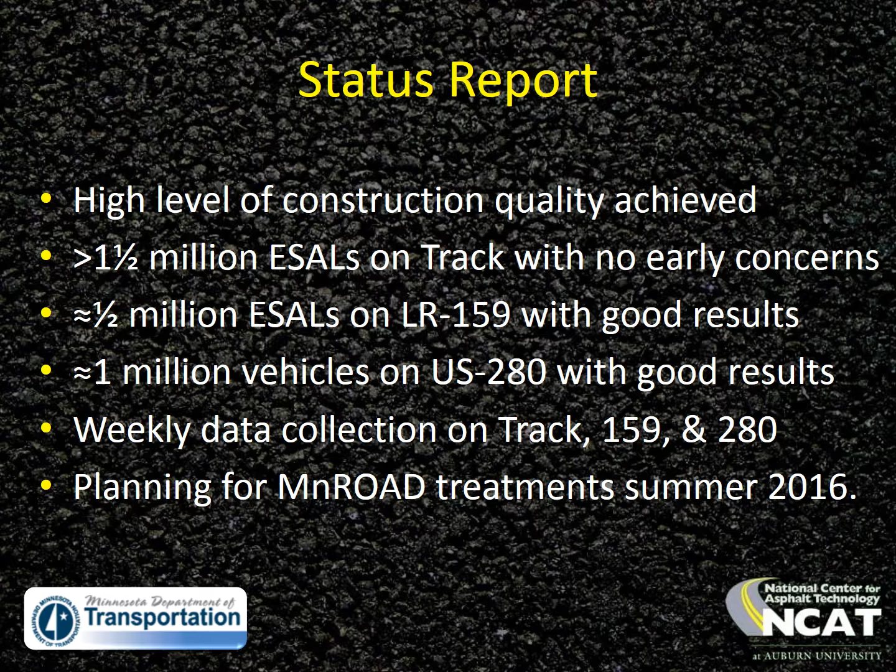At the end of every research cycle, we host a conference. We've already scheduled the next one, it's in March of 2018. What's fun about these conferences is the focus of everything is implementation, taking our findings and doing something with it. So that's what we do.

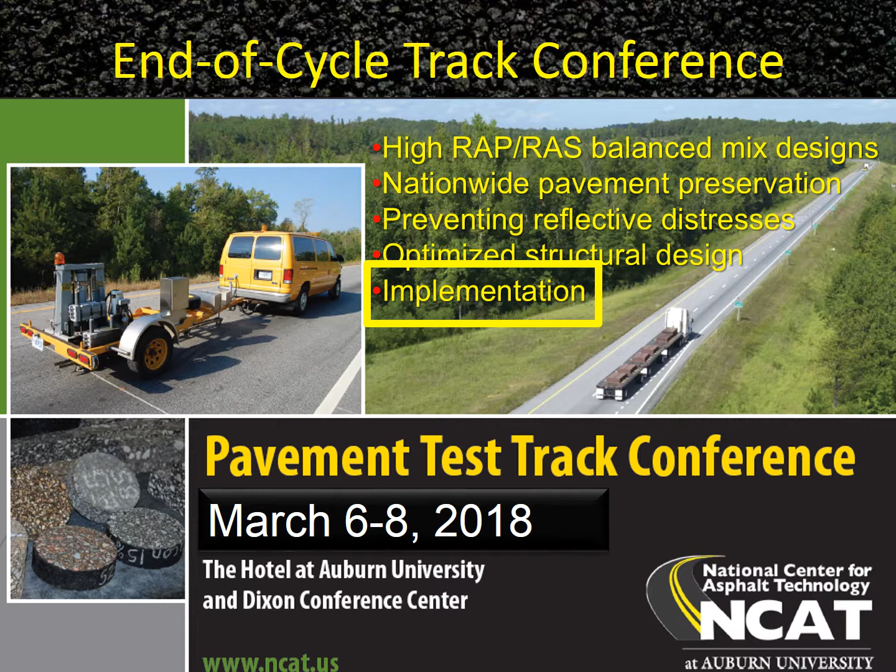And I'm going to go out with our mission statement. We want to help state DOTs make positive change, and we want to promote real innovation. We take a lot of pride in doing that, kind of standing in the gap between industry and agencies so we can make sure we do the right thing.

I have no perception of time, so I'm sure I ran over.

I'm going through a lot of family stuff right now, and it's a little harrowing for me, but when I say I'm proud to be here, I mean I'm really, really, really proud to be here.

Does anybody have any questions? That's a lot to talk about, but yes.

More binder. Okay. More binder actually makes a more durable mix.

How does that affect the total installed cost? Do you have any idea? In other words, if we went from 5% binder to 7% binder, what would that result in the installed cost of a ton or a mile or whatever of pavement?

Well, it's all based on the economy of the liquid asphalt, the virgin liquid asphalt. That is the controlling factor in the cost of the mix designs. We're not talking about going from 5% to 7%. We're talking about, in some of these mixes, on the issue of gyration level designs and healthy binder contents, usually you're talking about 2 or 3 tenths more liquid.